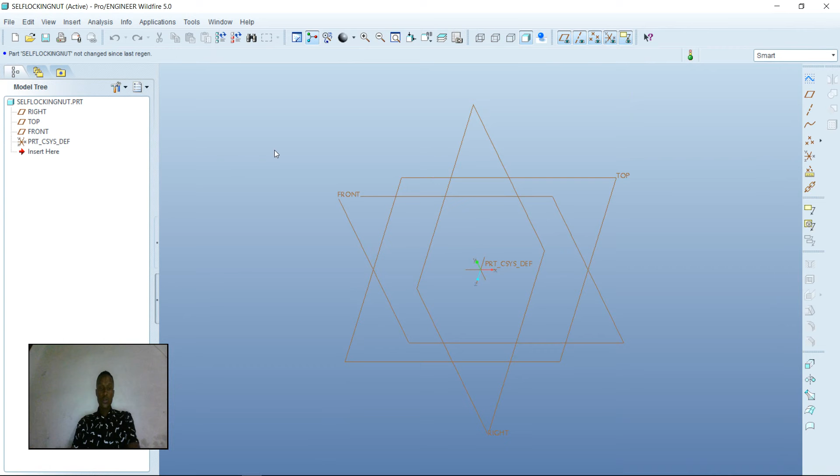So I'm going to sketch this nut from the front view, from the front plane. So I'm going to choose the hexagonal shape under the palette option here, and I'm going to double click and sketch this hexagonal shape here, or you can even sketch it here or here or here. So I'm going to sketch it here.

So now I'm going to modify these dimensions because I want the distance across flats, which is the distance from this line to this line, and I'm going to delete. So let me check my dimensions. So the distance across flats is 155. So I'm going to enter 155 here.

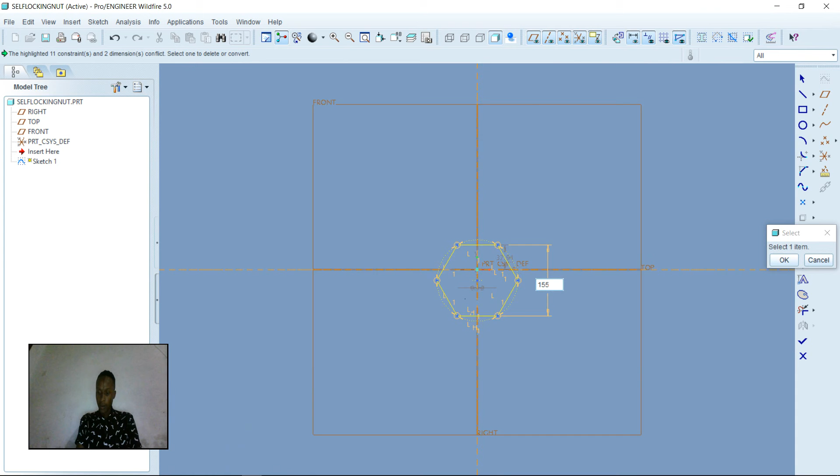Now I want to align this point to this axis. So I'm going to use this option here, and I'm going to select this point to this point, and I'm done. And I'm going to enter a distance of 0 here. So as you can see, it's now aligned.

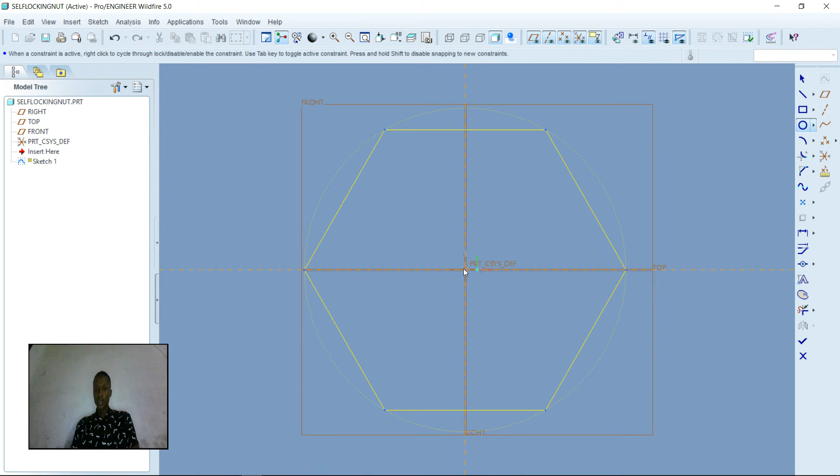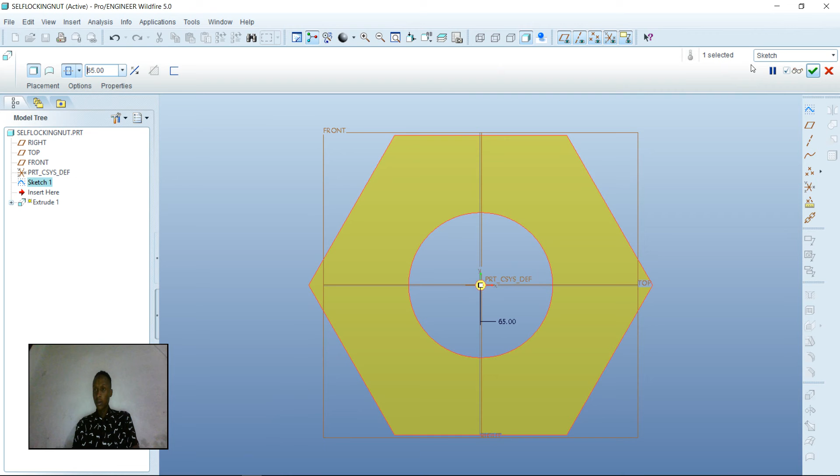So now I'm going to sketch the circle of diameter 75, which is drill to hole. So I'm going to enter the circle command, and I'm going to enter the diameter of 75. Done. So I'm going to extrude this both sides to a distance of 65. So I am done. So I can preview this. So I am done.

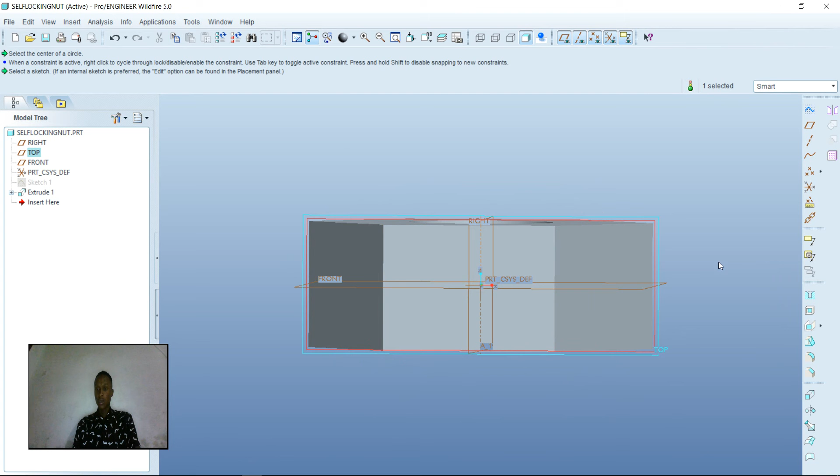Now I want to produce this curve and also this curve. So I'm going to use the top plane and enter the sketch mode. So I'm going to select my references. So I'm going to enter the circle command, and I'm going to sketch a circle, and I want this circle to be tangential to this line and also this line. So I'm going to use the line to a curve tangent option here.

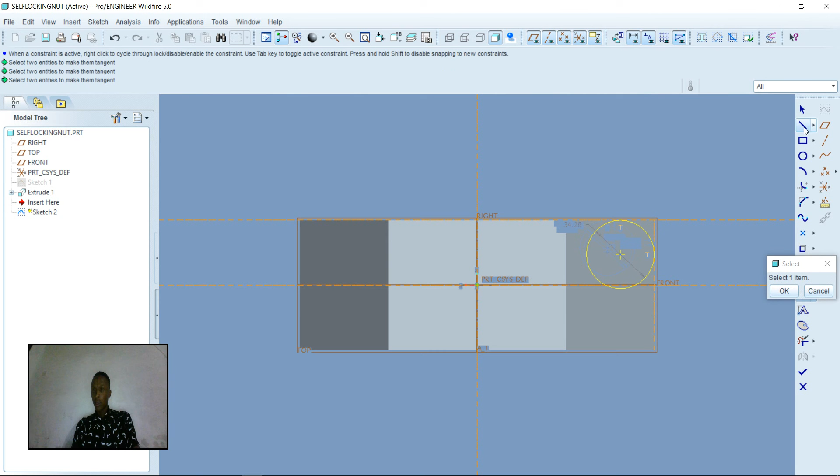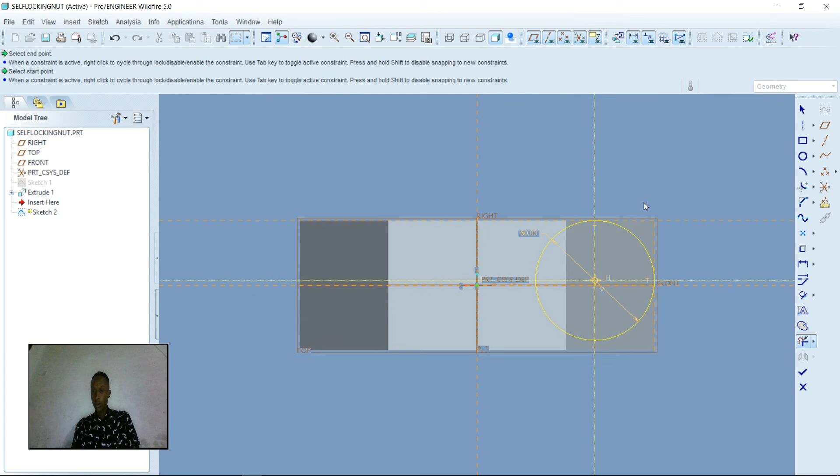And I'm going to enter the diameter of 60, because here we are given the radius of 30. So I guess I am done. So now I'm going to select the center line here, and I'm going to sketch a vertical line and also a horizontal line here, and I'm going to remove material.

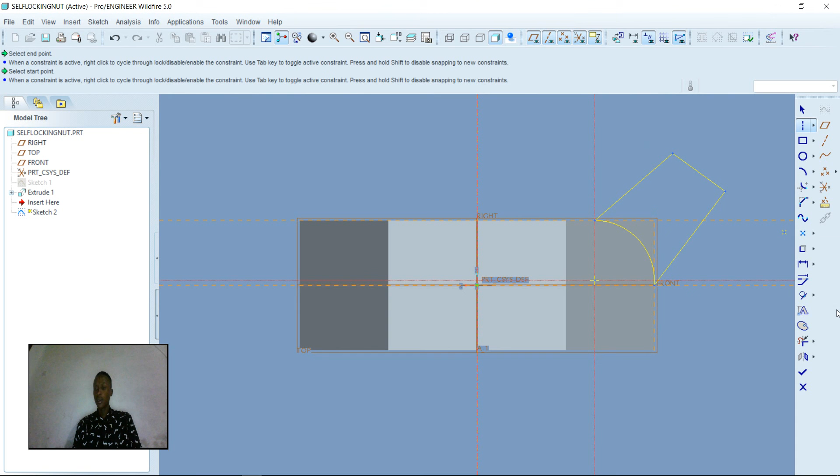So I'm going to enter the line command, and I'm going to draw something like this, and I'm going to select the geometric center line, and I'm going to sketch it here, which is going to be the line of revolvement, whereby this part is going to be revolved here. So I'm going to select done and select the revolve option, and I'm going to remove material and view this. So as you can see,

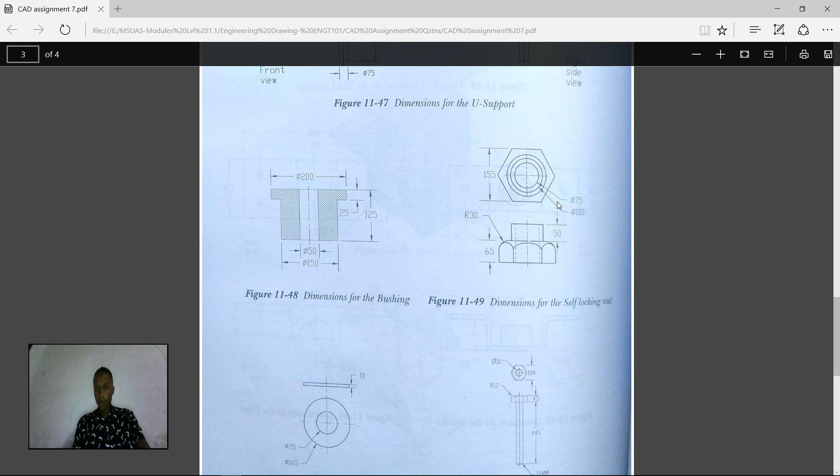I am done. So now I want to produce the cylindrical part, which is on top of the self-locking nut, of height 50. So I'm going to sketch two circles of diameter 75 and 100 using the top surface. I'm going to select this top surface, sketch. So I'm going to select my reference, which is this circle, and also the x-axis and the y-axis.

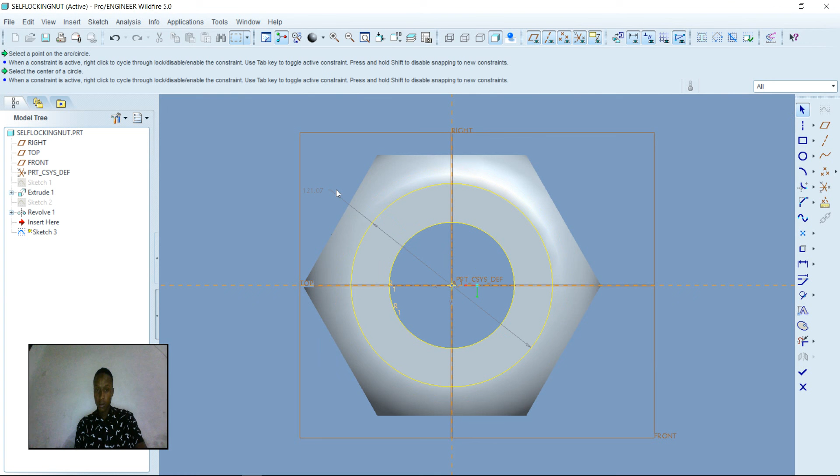So now I'm going to enter the sketch circle mode, and I'm going to draw a circle of same radius and also another circle of diameter 100. So I guess I am done, and then I'm going to extrude it to a distance of 50. So I'm going to preview. So as you can see, we are done. So I am going to save this.